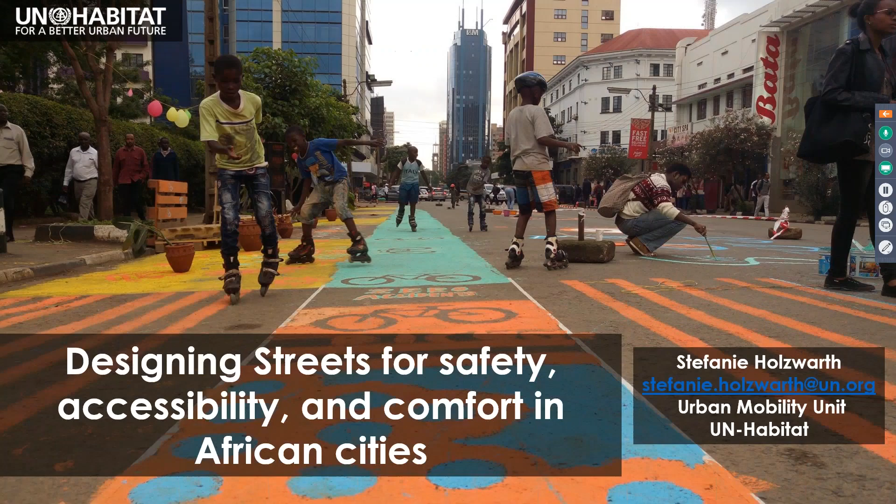We are headquartered in Nairobi in Kenya. As Blake has mentioned, I'll be talking about a street design guideline we have recently developed, and hopefully giving you a few ideas on how to make the streets in your city more accessible and safer for pedestrians and cyclists.

This is a photo that really illustrates my daily life as a cyclist in Nairobi. You really need to be brave to be cycling or walking. However, my dream for the African continent is that cities manage to design their roads in a way that makes them safe for pedestrians and cyclists.

One feature that causes a lot of road safety hazards is vehicle speed. With this graphic, I would like to show you how vehicle speed determines the safety of pedestrians.

On the top left corner, you can see the vision of a vehicle user when he drives at 20 kilometers per hour, with pedestrians alongside the road. If one of those pedestrians stepped onto the road at that moment, they would actually be safe. This could be kids running after a dog or a ball, or any fast-moving pedestrians crossing the road.

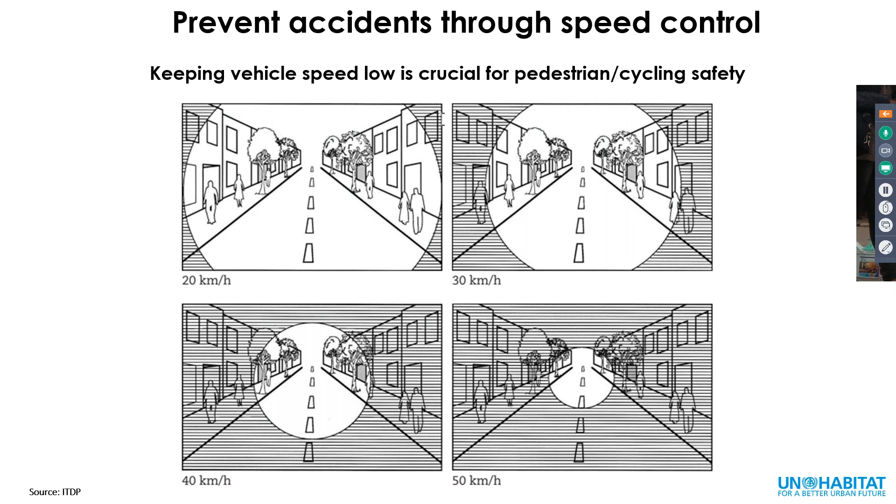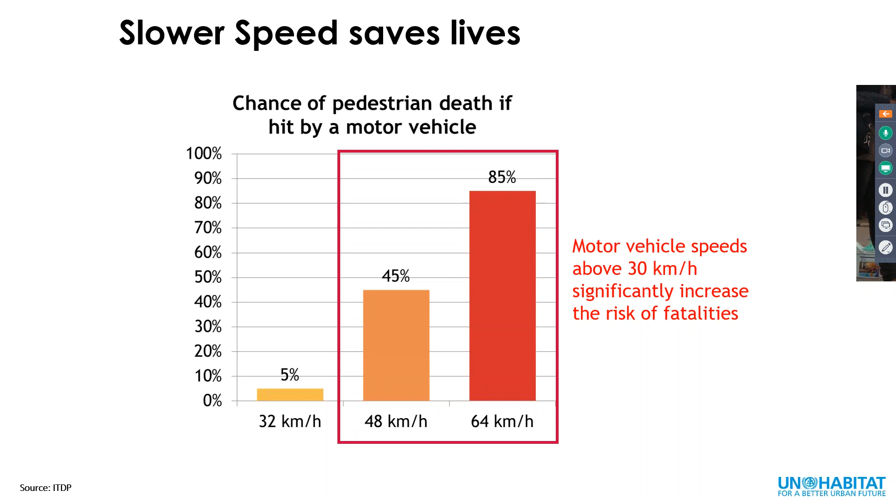Now, the problem we are facing is that most cities around the world have speed limits in their urban areas of 50 kilometers per hour, which poses an enormous risk on pedestrians.

What do we need to make our pedestrians safer? We believe all roads and urban streets need slow zones. If you have a narrow right of way, as shown on the left, the entire width of the road should be designed as a slow zone, reducing vehicle speeds to less than 30 kilometers per hour and creating a shared space where pedestrians, cyclists, and motorists share the space.

If you have a wider street and a bigger right of way, you can separate the different transport modes into separate lanes - for example, public transport lanes, a carriageway for motorists, and also safe walking and cycling lanes.

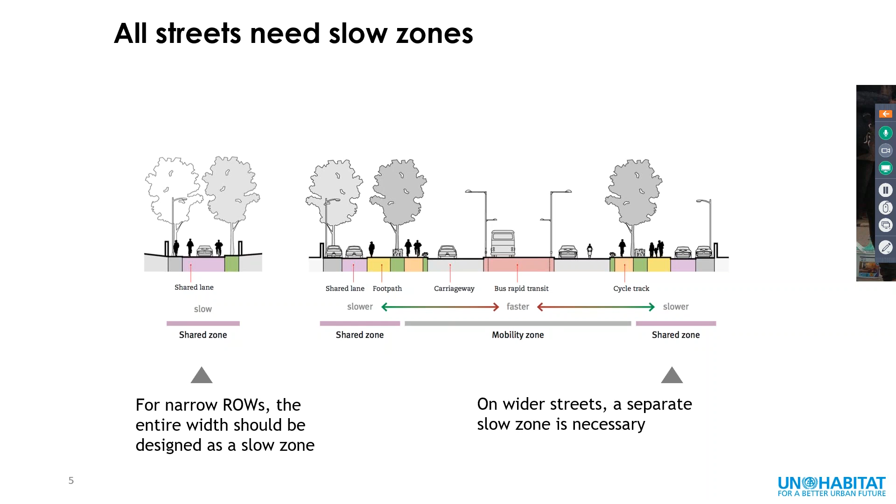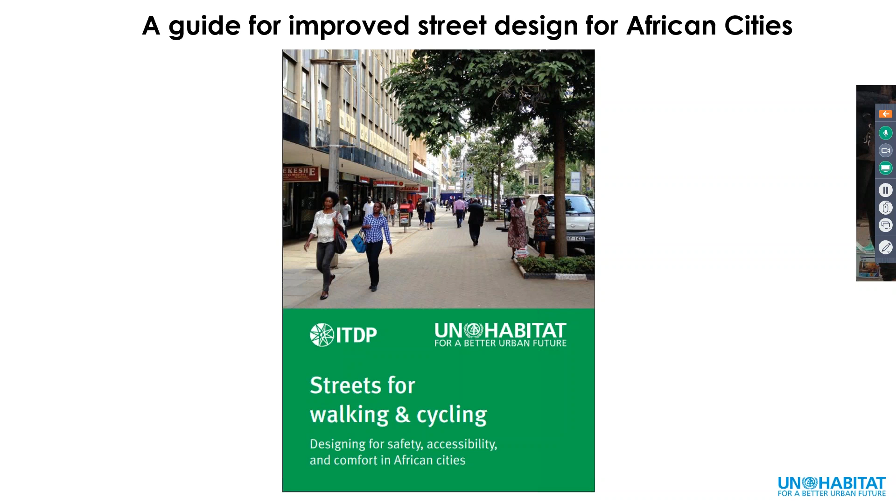Blake has mentioned it in the introduction - we have recently developed a guide for streets for walking and cycling for African cities, in collaboration with our partners from the Institute for Transportation and Development Policy. I would like to briefly take you through a few design ideas from that guide.

First, I would like to talk about footpaths. We believe footpaths should be divided into three zones. There should be a clear demarcation for a pedestrian zone in the middle - a continuous space for walking with a minimum width of 2 meters, so that two wheelchairs can pass each other in opposite directions. This pedestrian zone should be kept free-flowing, without any obstacles.

On the left side, we could have a frontage zone, demarcating a buffer between street-side activities such as cafes or shops and the pedestrian zone. On the right side, we could have a furniture zone for landscaping, street benches, lights, bus stops, and so on, clearly separating the pedestrian zone in a safe way from the motorized lanes.

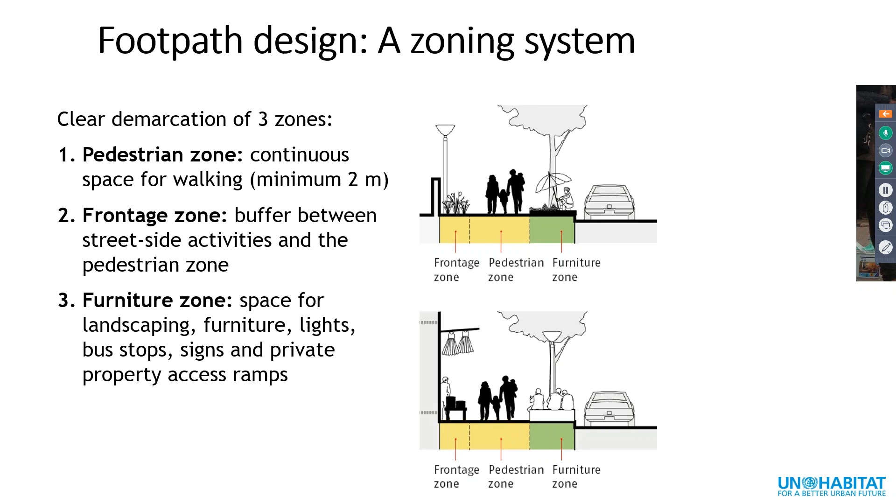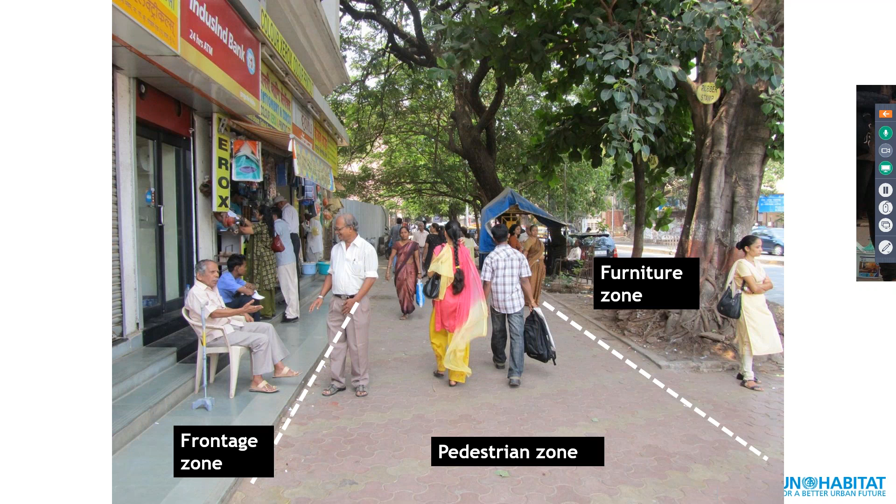How could that look in reality? This is a photo from ITDP from a city in India. You can see the frontage zone, the pedestrian zone ensuring free flow for pedestrians, and the furniture zone on the right keeping a safe distance from the motorized lane.

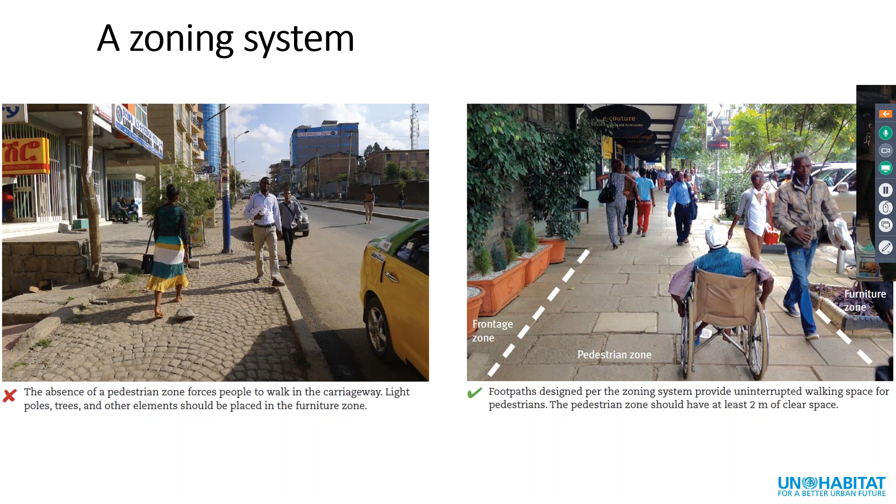On the right side, you again see a best practice example, this one from Nairobi, where you can see the clear demarcation into those three zones, allowing for an unobstructed flow of pedestrians in the middle.

This again shows the example, as I mentioned, at least 2 meters, if not even 2.5 meters, for two wheelchairs to be able to pass each other in the middle.

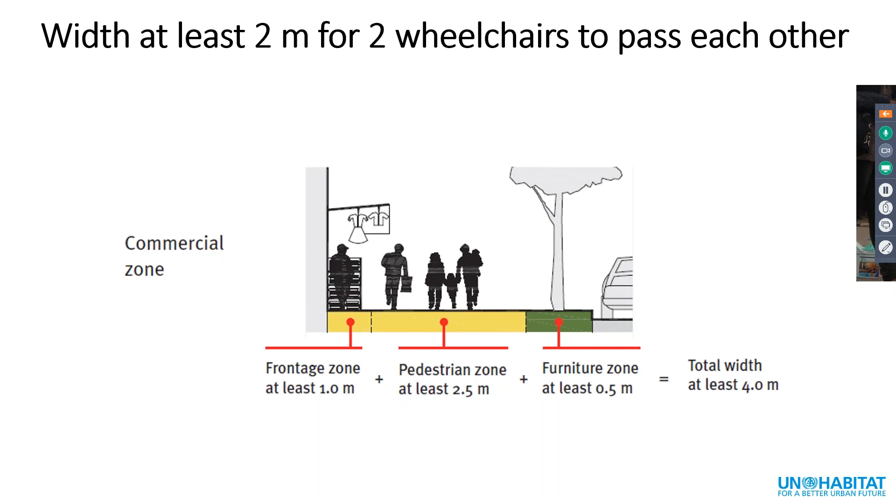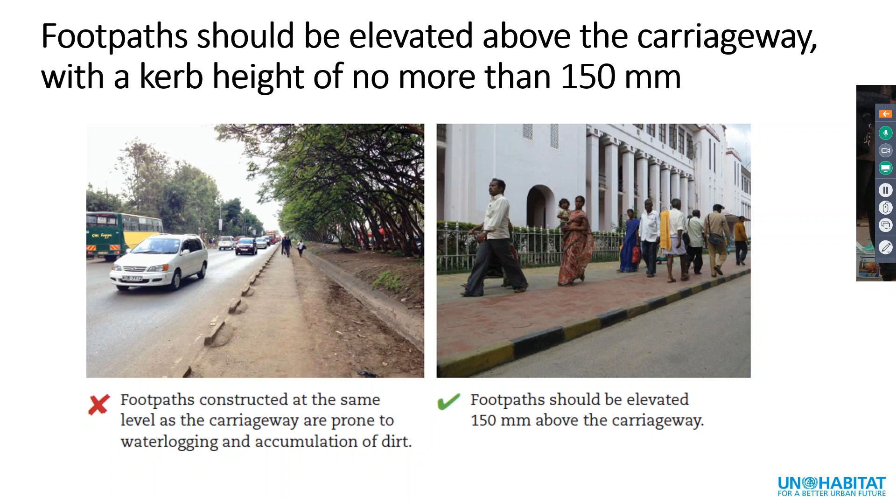Footpaths should in addition be elevated above the carriageway with a curb height of no more than 150 millimeters. On the left side, you can see an example from Nairobi where there's no elevation, meaning there's a lot of dirt on the pedestrian walkway and cycle lane, but it could also cause waterlogging in times of heavy rains. On the right side, you see a best practice example where the walkway is elevated, and pedestrians have a pleasant and safe environment to walk.

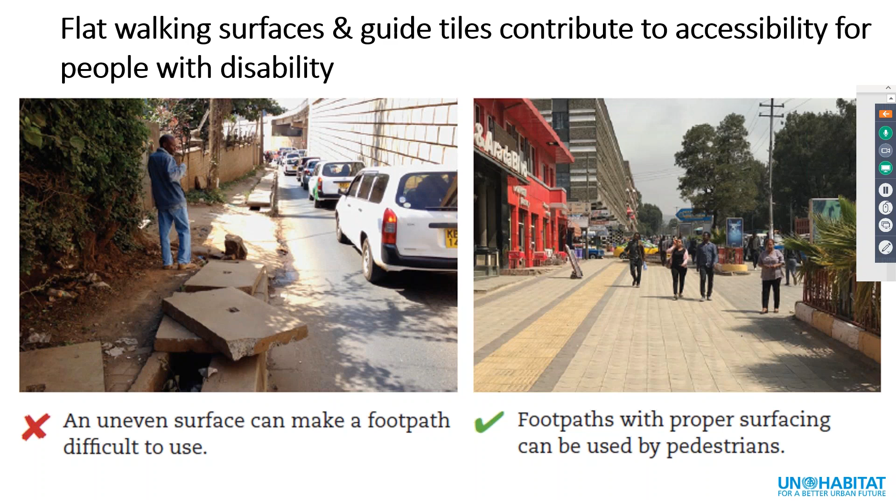So back to the footpaths. They should also have a flat walking surface and guiding tiles that contribute to accessibility for people with disability. On the left side, you see an example from Nairobi where the drainage is really hindering an even surface, so a person in a wheelchair would not be able to use those facilities. On the right side, you can see tactile designs for people with visual disabilities, who would be able to walk very safely and easily on that space.

Space for vending is often a question asked when we talk to African government officials. One opportunity to provide space for street vending is giving them space on the side of the pedestrian zone. As I said, there are 3 zones, and the pedestrian zone should be for the free flow of pedestrians, but street vending space could be given on the left side, as you can see on the picture on the right. This doesn't only enhance the local economy, but also enhances safety for pedestrians, because there would be a lot of eyes on the streets, especially at night times.

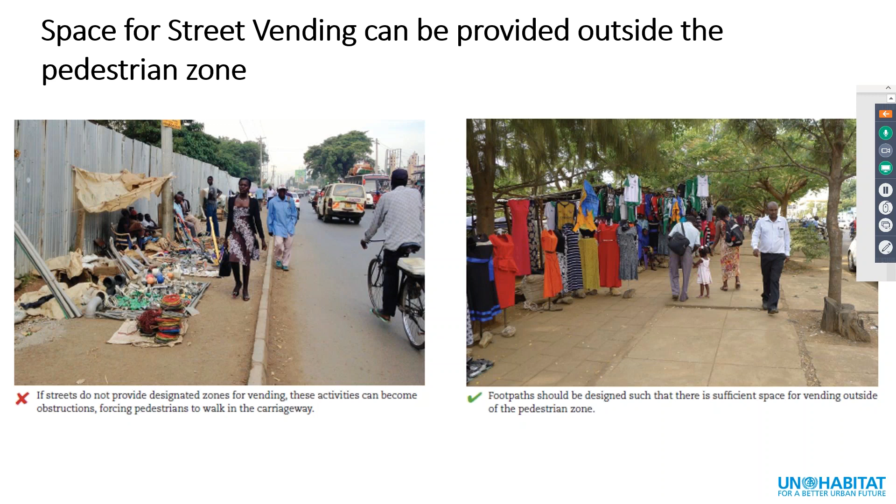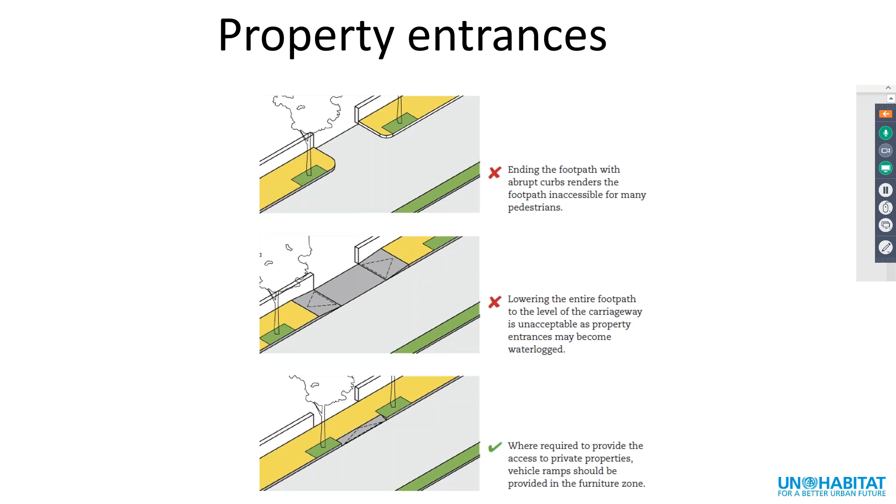How do we deal with property entrances? The first 2 graphics are examples we would not want to promote because they are not accessible. Imagine a person in a wheelchair trying to get from one side of the entrance to the other. In the first picture it would be impossible. In the second picture, there's a ramp that takes the pedestrian onto the level of the carriageway, but this is also very prone to waterlogging and allows for high speeds of cars. The best example is number 3, where we provide a continuous access and continuous level for pedestrians, and take the cars and vehicles onto a ramp to get onto the level of the pedestrian footpaths. That would slow down vehicle speeds and therefore enhance pedestrians' safety, allowing them to walk easily on a continuous footpath.

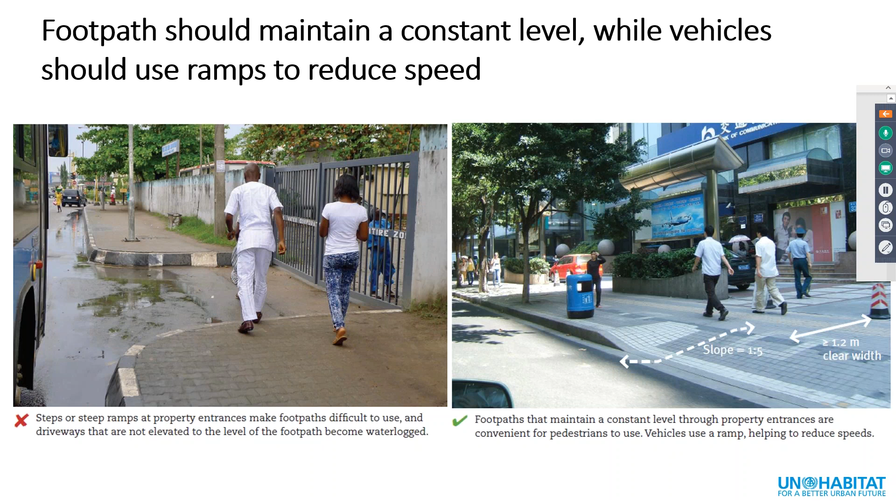How does it look like in reality? On the left side, an example that would be very challenging because the curb height of the pedestrian walkway is too high, and it would definitely not be accessible for someone in a wheelchair. On the right side, you see an example that is very well designed, where cars are taken up on a ramp onto a slope, and therefore the speed would be reduced.

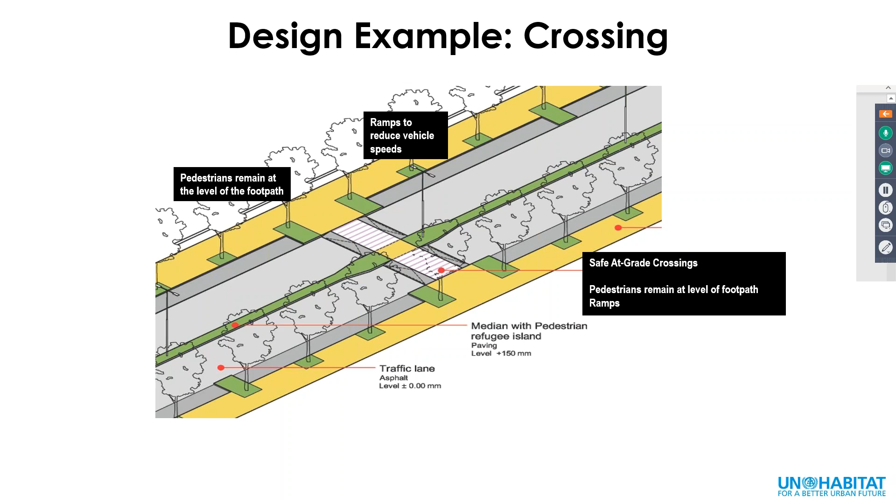How do we deal with crossings? This is a design example of a best practice crossing, where we again keep the pedestrians at the level of the footpaths, but build a ramp to reduce vehicle speed. This is what we call safe at-grade crossings, where the pedestrians remain on the level they have been, but the vehicles are taken up onto the level of the pedestrians.

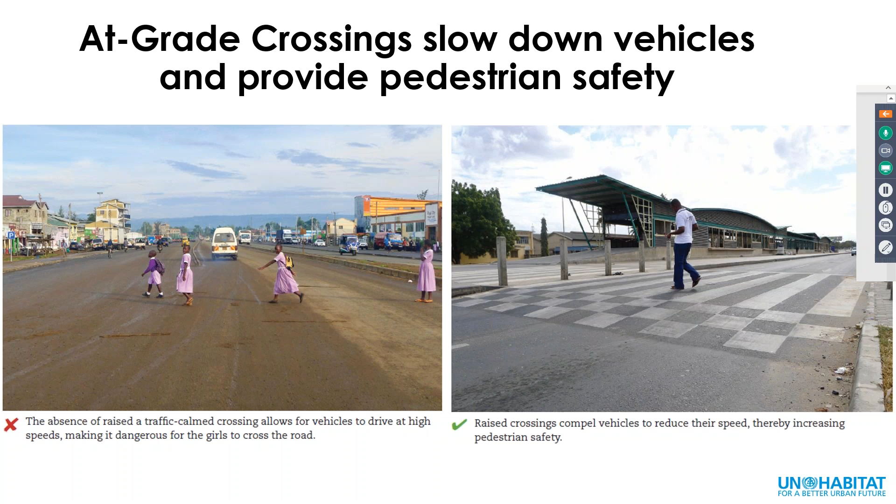This is how it looks like. On the left side, an example from Kenya, where there's no crossing facility being provided, and also no traffic calming measures, so this would be a very unsafe undertaking for school children to cross that street. On the right side, we see an example from the bus rapid transit system in Dar es Salaam, where we have a pedestrian crossing that is elevated, reducing the speed of cars, hence enhancing pedestrian safety.

If possible, it would also be good to avoid foot over bridges and subways. In an attempt to increase motor vehicle speeds, at-grade pedestrian crossings are frequently replaced by foot over bridges or pedestrian subways. However, these facilities are often very inaccessible and have a lot of drawbacks. Drawbacks could, for example, be increased travel time because people would need to go upstairs, and lack of universal access, again because of stairs that would take you either up or down.

These facilities often obstruct the footpaths. They are much more expensive than at-grade crossings. And they are also very much prone to harassment or other crimes, especially during night times. At the same time, if we keep the pedestrians either over or under the carriageway, we are not facilitating any speed reduction of the vehicles.

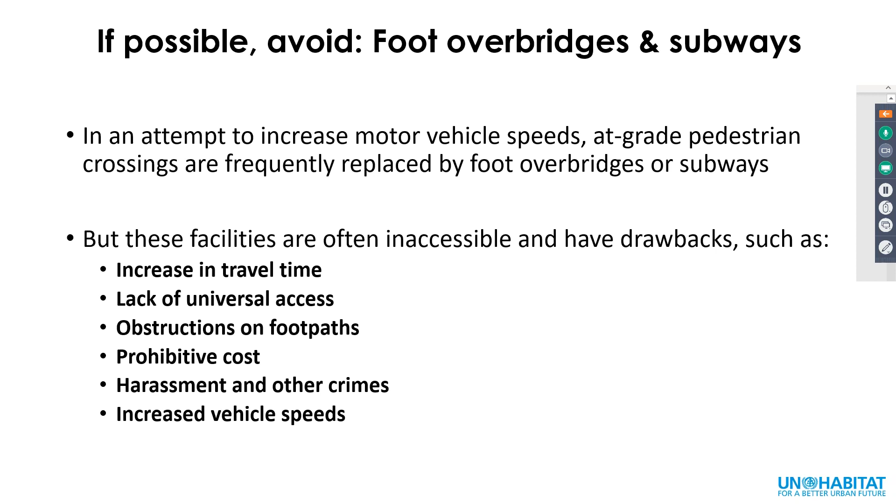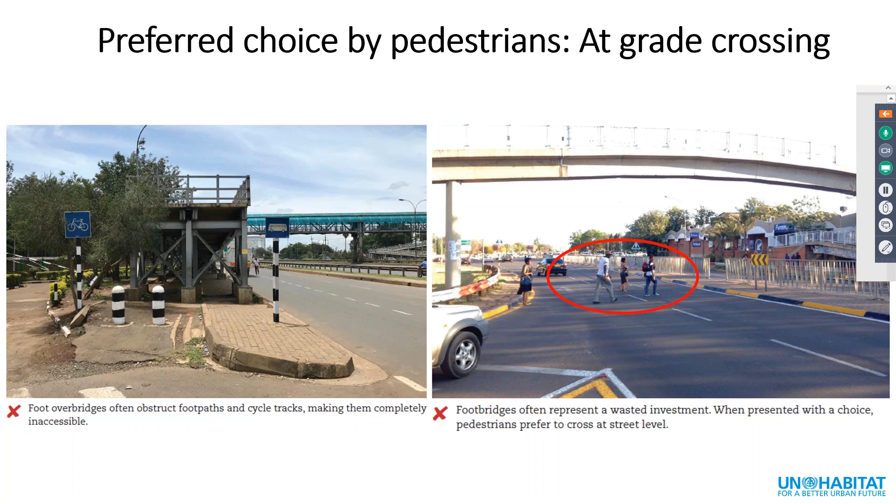Here are two examples of how this could be looking like. On the left side, you can see that the foot over bridge is actually occupying the pedestrian walkway, so that's a very bad example. On the right side, you can see that foot over bridges often also represent a wasted investment because pedestrians are still going for their desired line in crossing the streets the easiest way, meaning they wouldn't even utilize the facility.

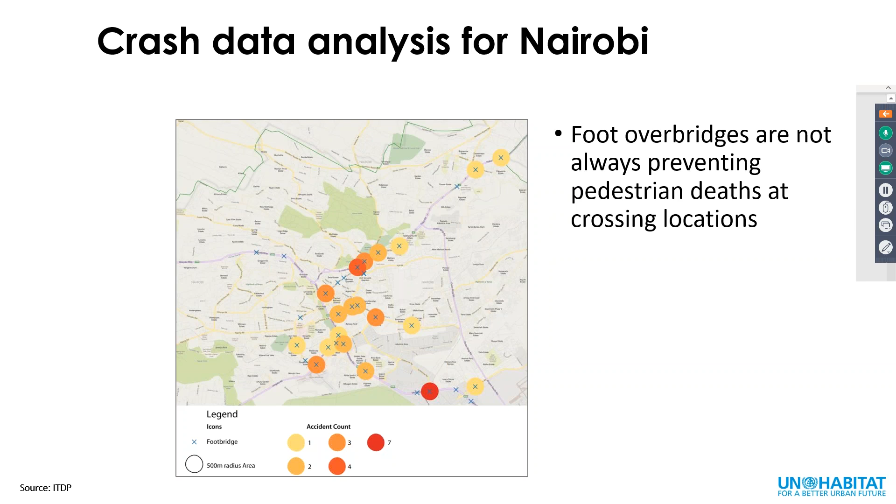Crash data for Nairobi has shown us that foot over bridges are not always preventing pedestrian deaths at the crossing locations, because as the photo I showed you demonstrates, even with foot over bridges, a lot of pedestrians might still be using the at-grade crossing and would therefore still be exposed to a lot of pedestrian safety risks.

How do we deal with intersections? This shows a safe intersection design where we would have direct, intuitive pedestrian crossings. Those should reflect pedestrian desired lines, and we should also avoid detours. So for the pedestrians, the crossings should be minimized in terms of distance, and we should also look into pedestrian refuge islands if we have a large right of way.

For example, in this case, where we have 4 lanes of carriageway, we should definitely put pedestrian refuge islands after 2 lanes, so pedestrians could stop over and take a moment of breath and then get to the other side.

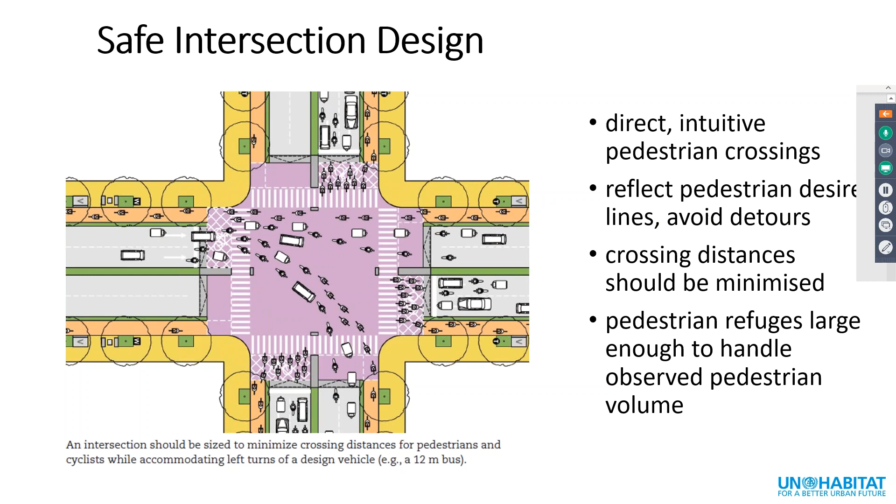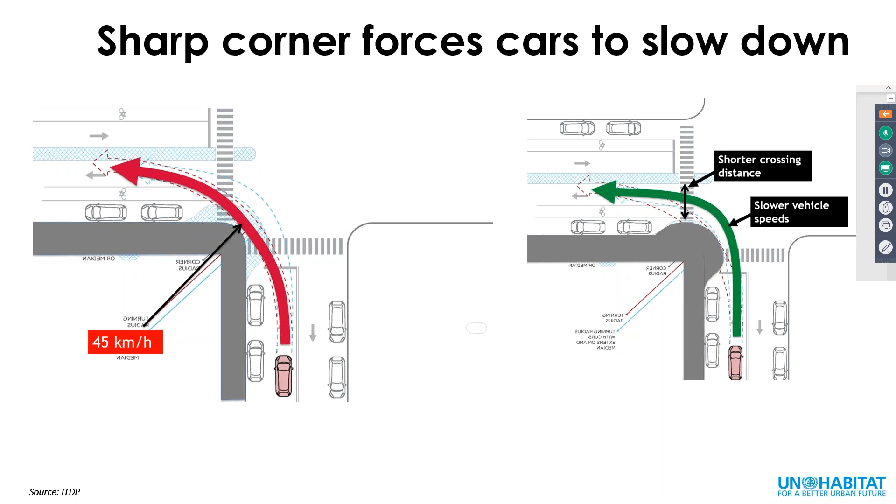On the right side, you can see a design that would make the turning radius much sharper, and that would definitely slow down the vehicle speeds to probably something around 10 to 20 kilometers per hour. And therefore, the pedestrian crossing there on the zebra crossing would be much safer.

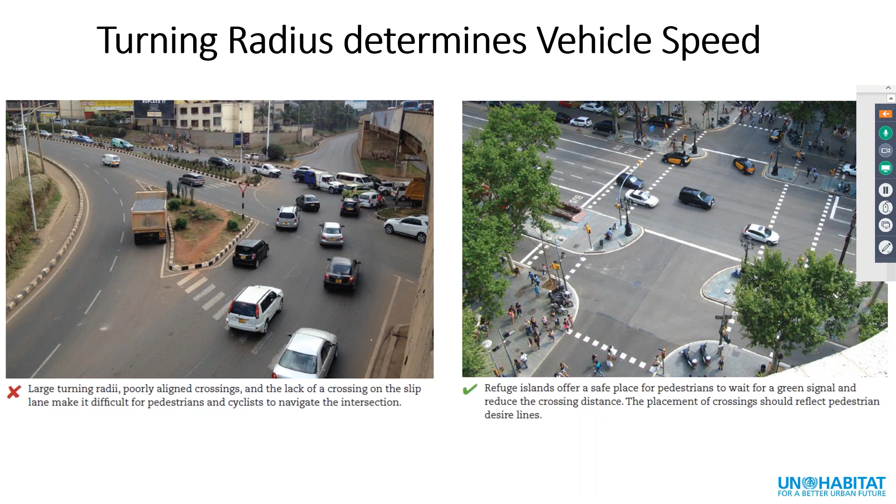If you ask yourself how your city gets to such design features, one activity that has really been very successful in the work that UN Habitat has been doing is temporary open street or placemaking activities. Those are transition experiments where, in a short term, temporary term, we are testing alternative street designs and alternative mobility cultures. Those are activities that really help us activate streets as public spaces, as safe spaces for pedestrians and cyclists, and they can be done through very low-cost interventions, such as pop-up activities.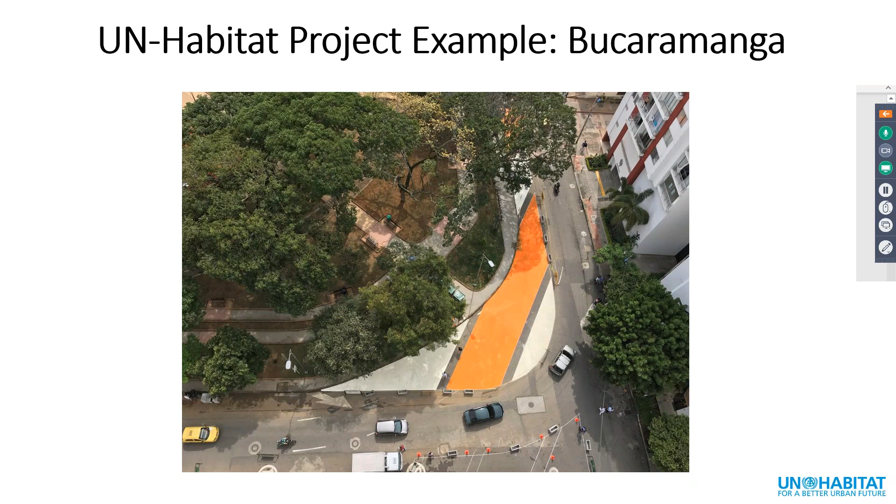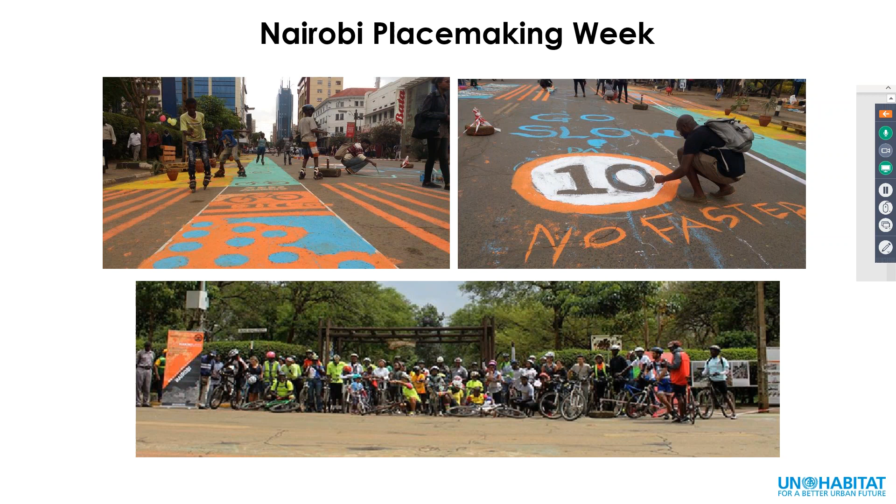Those are examples and photos from a placemaking activity that we have done in Nairobi, where we have tested through painting how the street could be better shared among the different transport modes. So we have also, for example, provided space for cyclists and safe pedestrian crossing facilities.

This is an example from Kampala, where we have tested how we can utilize streets better as public spaces for arts, culture, exhibitions, and painters, and it has really been a very successful exercise there.

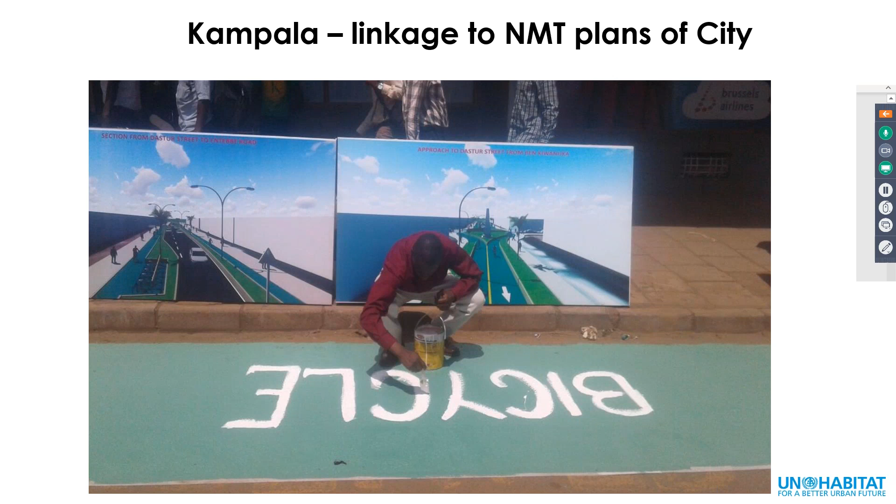What is very important with these activities is that you link them to the plans that the city has. In Kampala, the city government already has strong, far-advanced plans for a non-motorized transport pilot, and the street we chose is part of this pilot, making it a great activity for the government to sensitize the public on their plans.

That's the end of my presentation. If you are interested in the guidebook with the different design ideas, please visit the UN Habitat website and you can easily find it from there. Thank you very much.

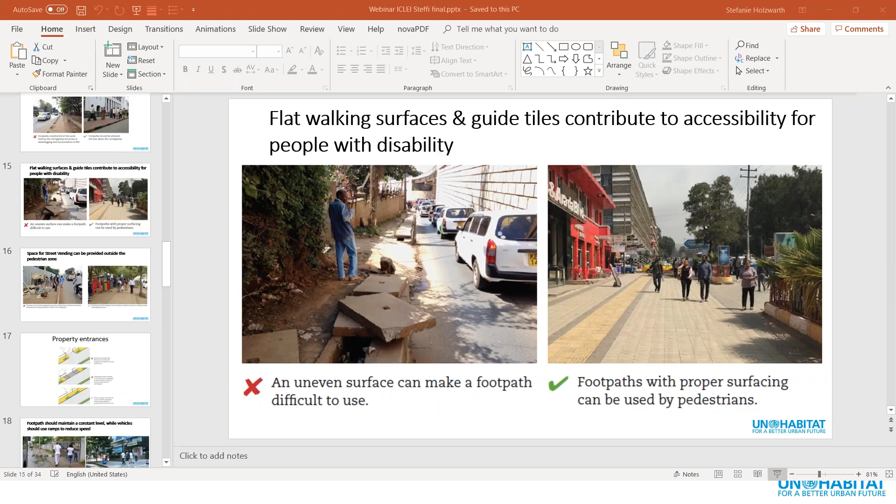Thank you, Stefanie. That was a really interesting introduction to UN Habitat's NMT guidelines. I noticed you mentioned that foot overbridges and subways were probably not worth their investment. Were there any suggestions from the guides on how to approach crossings over freeways? It's a problem we have in South Africa.

Yes, that's why we stated if they can be avoided, avoid them. But on freeways it's very difficult to have at-grade crossings because the speed of vehicles is very high, and a freeway is different in nature, speed, and what it serves than, for example, an urban road. So for freeways, I do understand it's difficult to build foot overbridges or at-grade crossings. But wherever they can be avoided, I would suggest avoiding them, because in South Africa I know they're also quite a safety hazard in terms of security at night.

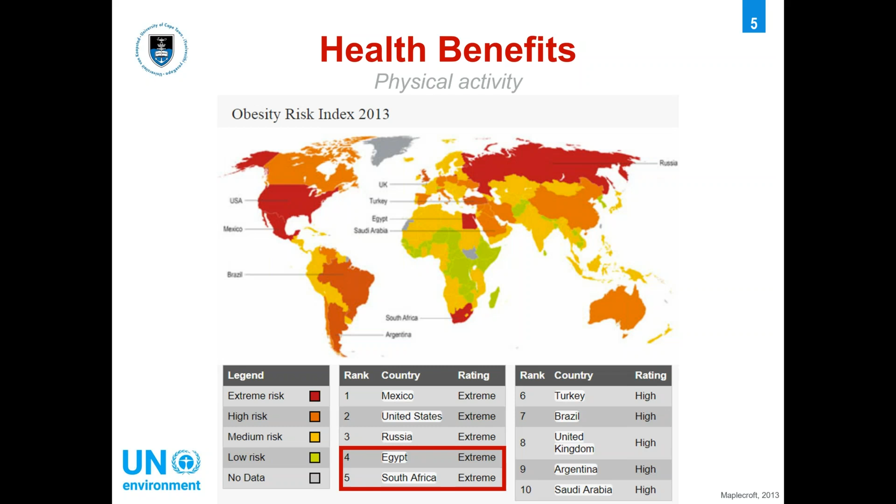Stefanie has very rightly touched on the other major health benefits associated with walking, and actually the benefit doesn't have that much to do with walking itself. It's to do with protecting pedestrians from vehicle users.

As has been stated, we're going to be potentially losing millions of people on our roads over the next few years to road fatalities. And this is catastrophic both for our communities and for our economies. We often speak about the emotional toll that these deaths take on us, but rarely acknowledge the economic one, even when it comes to evaluating where we allocate our budgets.

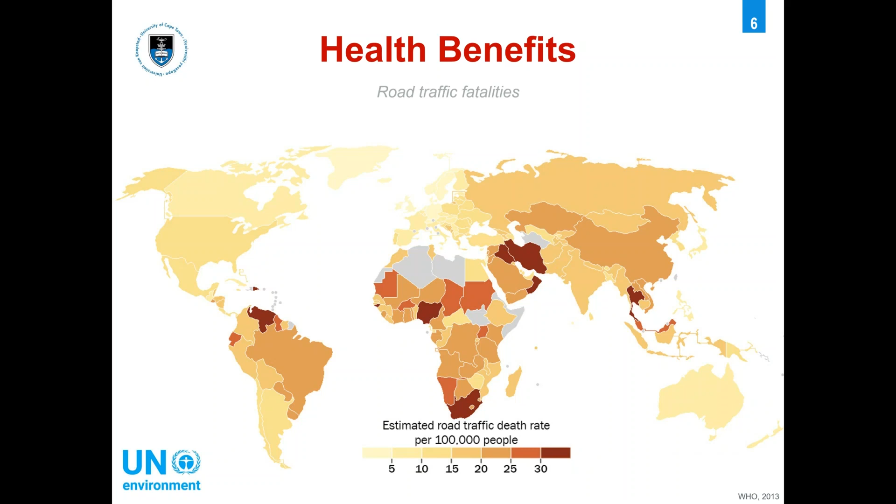And the vast majority of these road fatalities on our continent are pedestrians. And therefore, we could be adding whole percentage points to our economic growth by investing in protecting our pedestrians.

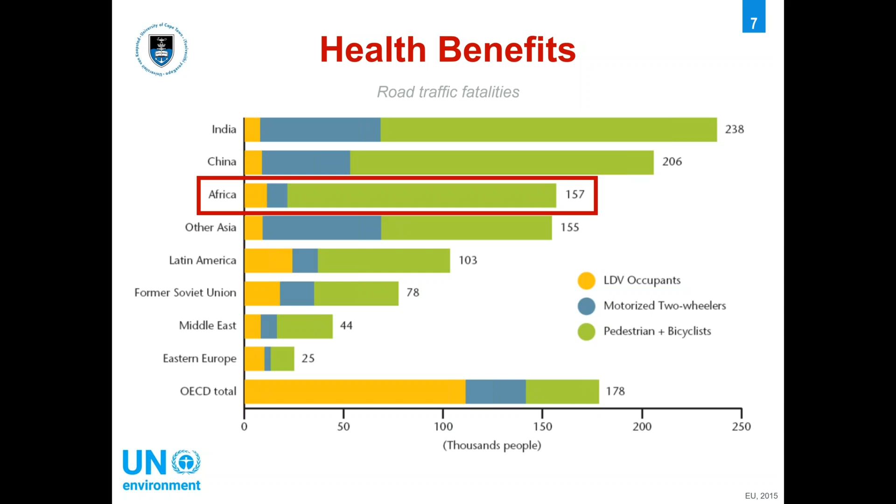And this is especially true for protecting and supporting our young pedestrians. Amend, an organization working in Tanzania, has been building pedestrian infrastructure around schools for as little as $20,000 and achieving a 25% decrease in child road injuries in those areas. So we have international best practice happening here on our continent at a relatively low cost.

Now, some of the benefits of investments in walking and cycling can't be easily quantified or monetized, such as the social benefits. But those benefits can be measured through interviews and surveys and other qualitative techniques. And a holistic picture of the effects of our public investments is critical to creating resource-efficient and productive cities.

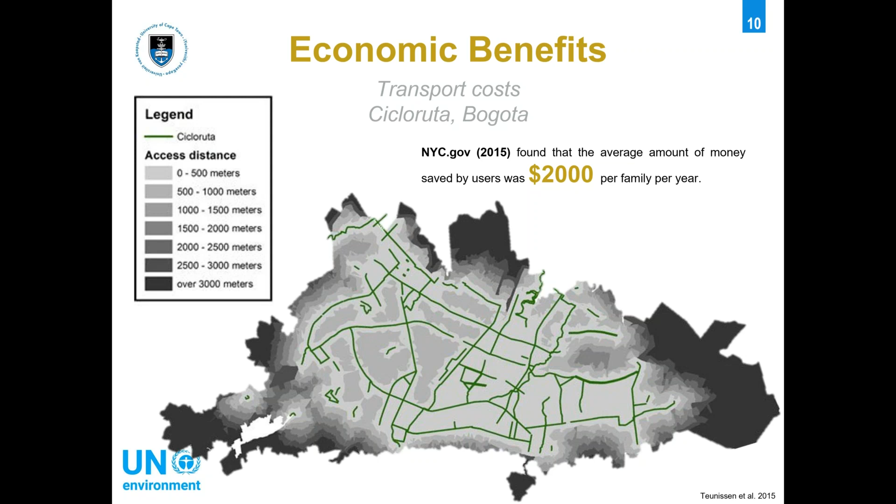Whereas some of the benefits of pedestrian investments are already monetary. The city of Bogota in Colombia built a 370-kilometer network of walking and cycling infrastructure. And they've estimated that the families that use that infrastructure save around $2,000 per year due to lower transport costs. Now, that is money that those families could be spending on their children's education or in starting a business. So pedestrian infrastructure can actually be an efficient way to redistribute wealth and promote economic growth within a city.

Now, all of this work has culminated in a project assessment tool that we built specifically to evaluate the benefits of investments in walking and cycling in African cities. I validated this tool by analyzing that walking network in Bogota. And as the first project, I've evaluated what the potential benefit would be of replicating that successful 370-kilometer network in Cape Town and in Nairobi.

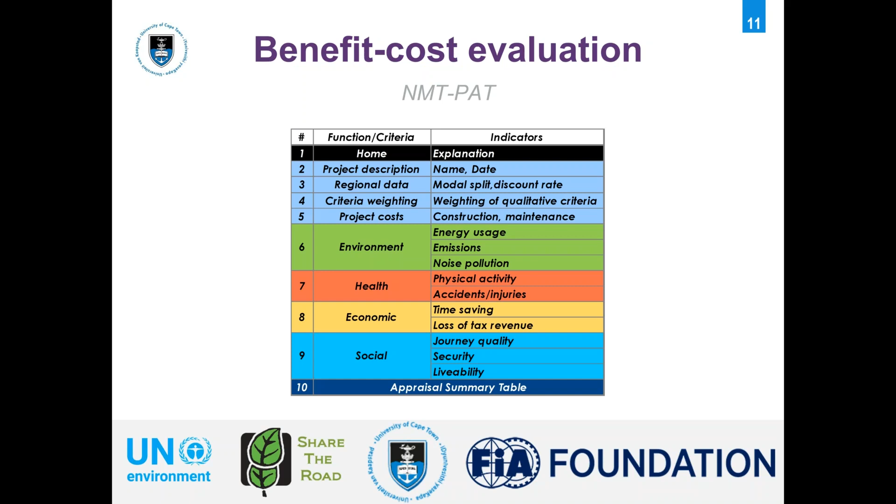Now, the health benefits of this kind of pedestrian network have shown to be equally impressive. Cape Town could be saving 10 lives per $1 million invested in a network like this. And as the average contribution to the economy of a person who lives in Cape Town is around 1.3 million US dollars, that means that the economic return on the investment could be tenfold, purely based on preventing the road fatalities.

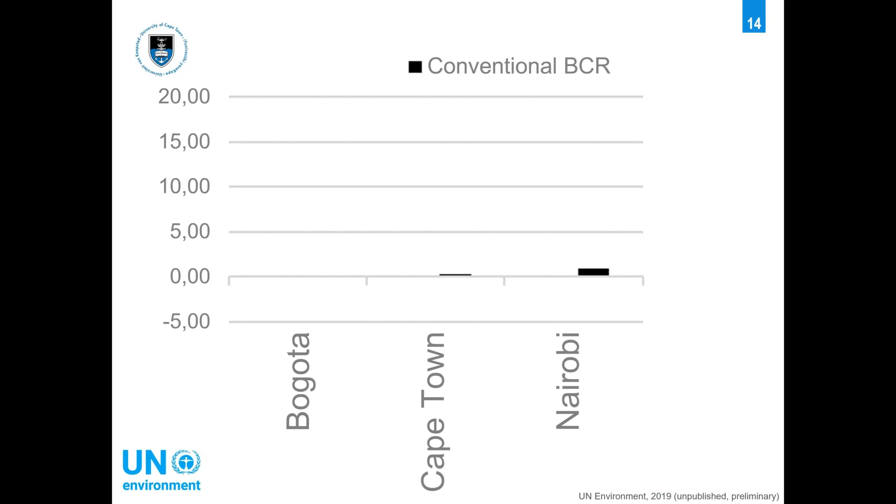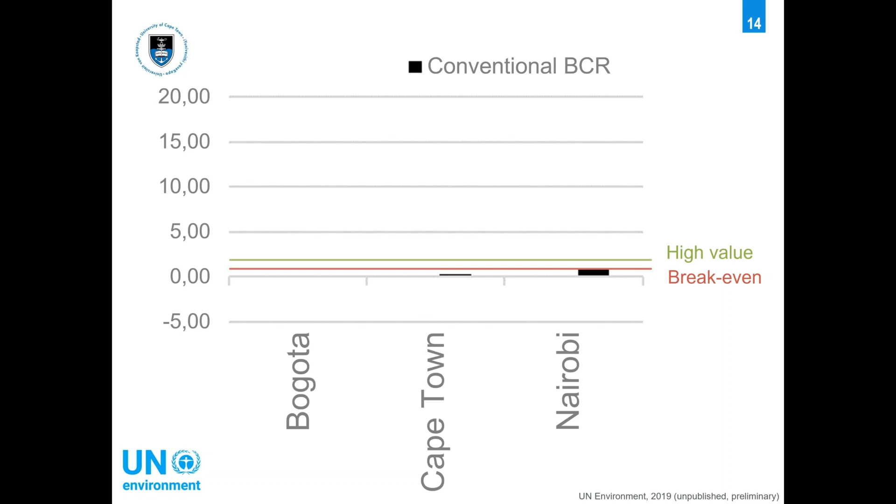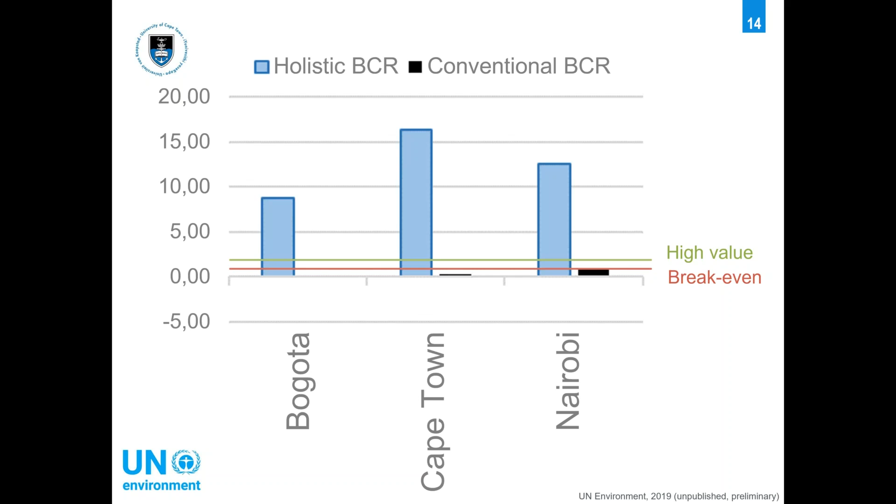And when I was looking at the most comprehensive review that I could find of pedestrian and cycling infrastructure investment so far, which is Davis 2010, she said that the economic justification for cycling and walking projects is rarely even considered in public policy decision making, let alone quantified. So even though she found that the average benefit to cost ratio of pedestrian projects around the world was about 13:1, the average return on investment for road projects is less than 2. So investing in walking infrastructure and walking programs could be generating the best returns of any investment that a city makes, and especially African cities.

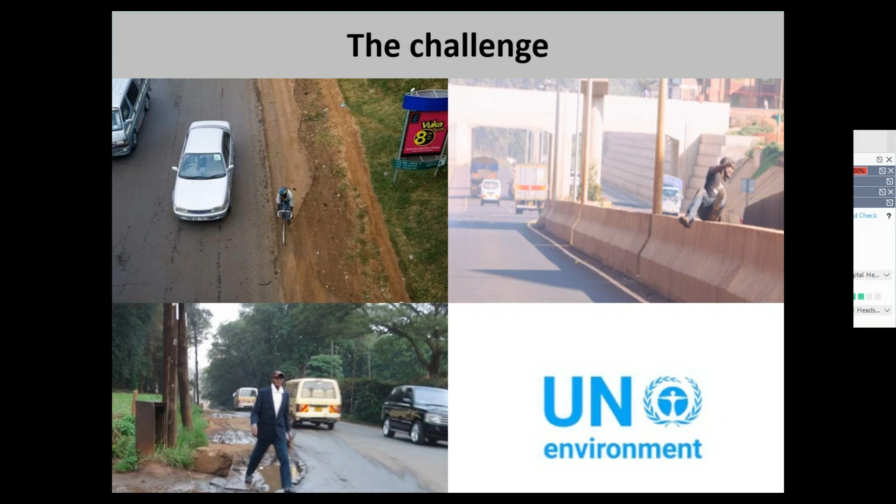We understand a lot of challenges we have on our roads, and we've looked at road safety. But millions of people, just like Sean mentioned in his data, also die from outdoor pollution. We have 3.7 million premature deaths worldwide in 2012. And if that was not enough, vehicle emissions are also fueling climate change. As we speak today, the transport sector is responsible for 27% of energy-related carbon dioxide emissions globally.

So as Share the Road, what is our aim? What are we doing about it? We work to encourage governments to move away from the old, no-equity way of prioritizing the minority, which is car users, towards providing for the majority — people who walk and cycle. In our part of the world, the developing countries, the majority of people walk to work or cycle to work. Those people do not own cars. Providing infrastructure for the poorest is a sign of a city's equity.

A bike lane shows that a citizen on a $30 bicycle is equally important to one in a $30,000 car. That is what we stand for, and that's what we believe in. Why do we push for this? Because people also need infrastructure.

If you look at the screen before you, we have pictures on the left and pictures on the right. The photos on the left show how there was no infrastructure for those who are walking, and look at the population that is walking — there was no infrastructure, they are sharing this road space with vehicles. If you look at the same photo on the right, you see there's an attempt at provision of infrastructure, with at least an elevated pedestrian walkway. It's not the perfect scene, but at least there's a difference — it's clear that there's this segregation for pedestrians. Same with the picture at the bottom: we have a child who is happily cycling in a place where previously there was no cycling lane.

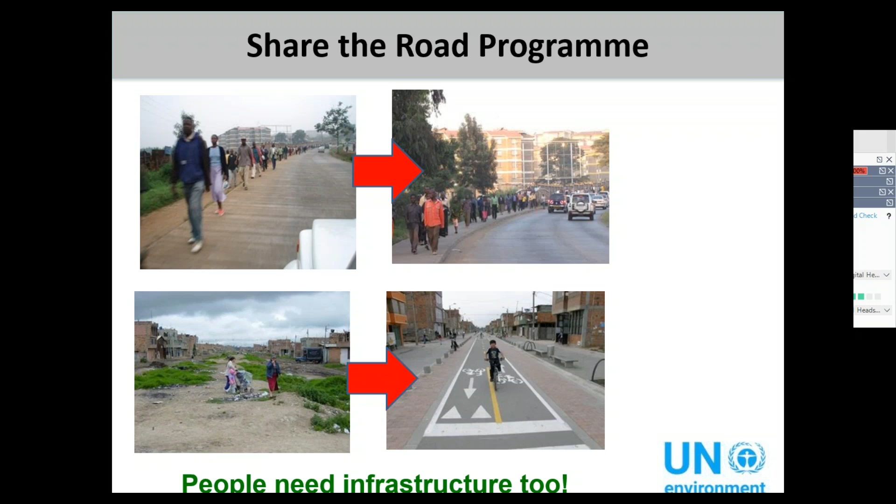So the role of policy is that policy gives direction, policy shows commitment. The process of developing the non-motorized transport policy is also as important as the output itself.

Key to our work is putting in place walking and cycling policies at national and city level. We engage both the federal governments and the county governments.

We are often asked why we need standalone non-motorized transport policies and why it cannot just be included in a wider transport policy. When you look at the lack of provision for pedestrians and cyclists, integrating those needs into wider policy is not working. Until the citizen who walks and the citizen who cycles is also prioritized properly, we will have to continue to push for these policies and bring attention to their needs.

Why is it important that the policy itself, or I should say, what is more important is that the journey to get there brings decision makers in government at national level together with city level governments and others such as academia, private sector, civil service, civil society and citizens.

We understand that the policy gives a public commitment to change and can often include critical fiscal measures, because the financing has to be involved as well.

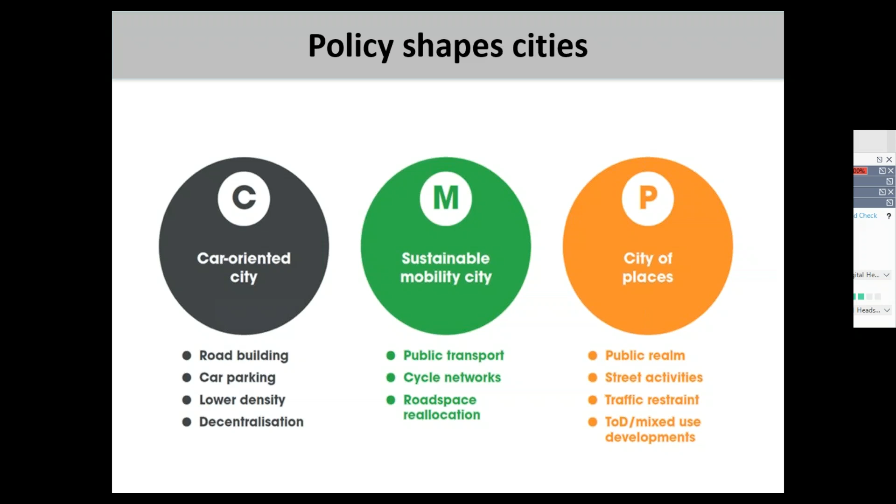When we come to financing, first of all, our work in the Share the Road program covers 7 African countries. So far we've developed non-motorized transport policy in Kenya, Uganda, and Nigeria. We're currently developing the NMT policy for Lagos, and want to do it countrywide. That is encouraging, because it was the citizens and the government that prompted a nationwide policy for non-motorized transport in Nigeria. We've also worked in Ghana, Zambia, Rwanda, and Ethiopia.

Now of course policies are all key, but it cannot be done without financing. Without financing, policies cannot become a reality. An example of financing measures for NMT is Nairobi. Right now, Nairobi's non-motorized transport policy ring-fences 20% of the entire road construction budget dedicated to non-motorized transport.

So as citizens, governments and stakeholders, we have to be very deliberate when it comes to non-motorized transport. We have to make commitments and align those within the policies we develop, including financial commitments, because within Nairobi 50% of the people walk and cycle. In 2015, 700 people died on the roads, with 500 of them being cyclists and pedestrians. So the ring fence of 20% of every road construction budget to cater for non-motorized transport is a positive step, and that's encouraged wherever we develop an NMT policy—there has to be a commitment for financing.

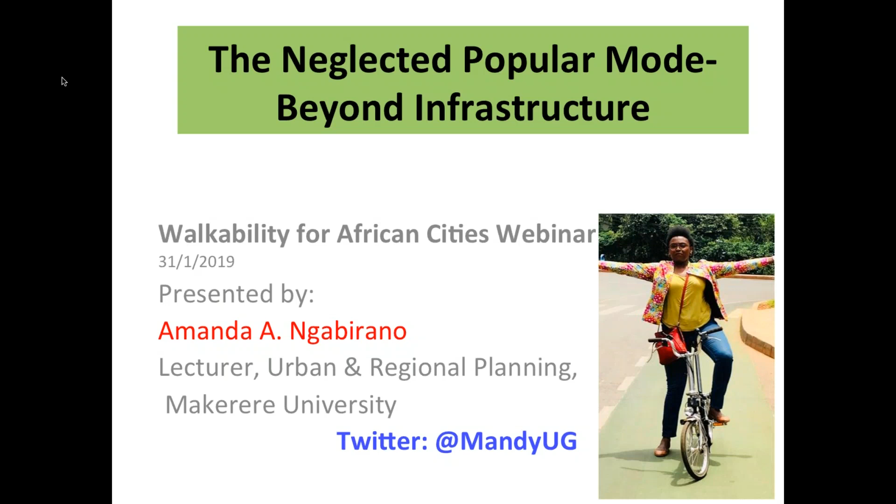We all walk. In the city of Kampala, in Nairobi, the majority of people are walking. So sometimes they don't understand what we are talking about when we are telling them to walk, or when we tell the leaders that walking is good. They kind of feel, yeah, we walk.

But the situation under which we walk is what is lacking or is not really pleasant. So we are lucky that we are still green. In fact, if we are to talk about green cities in terms of mobility, Kampala, I think, is one of them, because the majority are still walking, and the motorized transport is about 10% only, and 60% is actually active.

Mobility, mostly walking, and some people are cycling. As we move around our streets, we see scenes like this. They look like some movies, bad short movies. This is like a whole family crossing a road that performs like a primary road, actually, because it connects to Nairobi, to Mombasa.

And there is no facility for people to cross. Like Stephanie mentioned, there's a footbridge somewhere there, but there's a market across this road. And there are also schools somewhere close by, so it's difficult for people to use that footbridge and go the other side. So it's generally unsafe to walk, and that's why when people see corporates walking here, they ask them why they are walking.

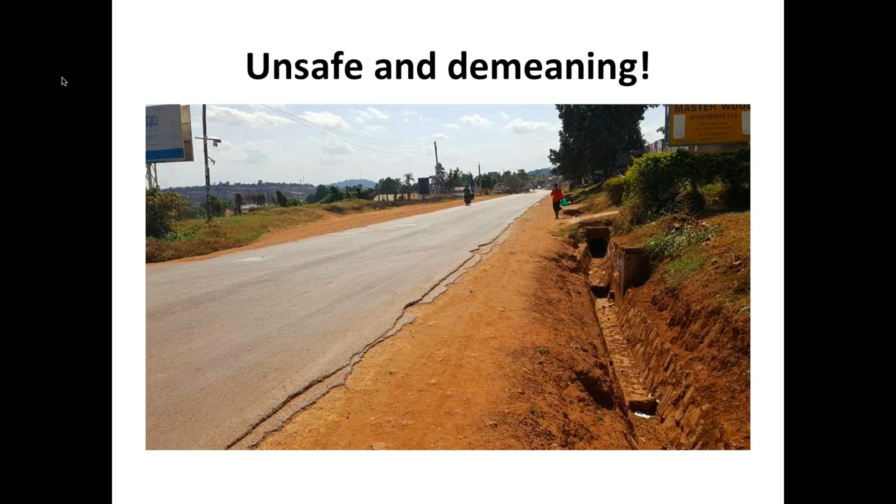Some walking facilities look like this. Actually, here there's no walkway at all, and sometimes vehicles kick us out of this space. And we have to find our way somehow to manage. And this goes on, it becomes a normal thing for people to do. And we feel like sometimes we are cows, excuse me.

So the thing is that the pedestrians also over time take this as something normal. They pity themselves and know that in an African city, in my city, this is how walking is. I don't maybe deserve better. So there's kind of some level of lack of knowledge, of awareness that there should be something like a walkway.

But then the other thing is that when roads are being designed and constructed, what we see on paper is not normally what is actually implemented. So there seems to be a gap in terms of monitoring of road construction projects to make sure that they actually look like what they're supposed to look according to the plan.

In Uganda, we have a policy, thanks to UNEP. The policy has been around, I think, since 2012 or 2013. Some of it has been implemented in Kampala. The new roads, most of them have walkways, good walkways actually. But in most of the country where other road construction projects are taking place, it's not known. And where there are some road networks being implemented, the walkways are not consistent, they are discontinuous.

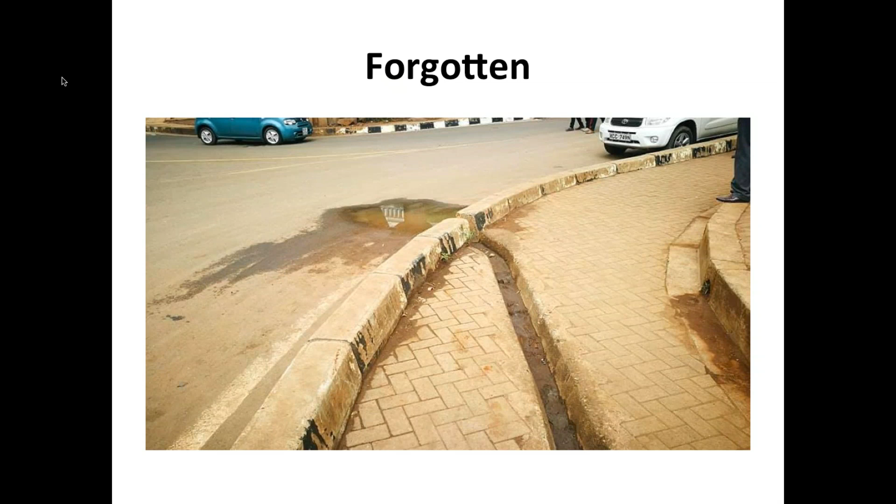It has to start from the beginning, as Stephanie mentioned, and it's nice that we can now have a manual to guide all this. But the gap will still remain in monitoring and evaluation to assess if it's being done correctly or not.

So it's all beyond infrastructure. We have an aspect of the last and first mile in most of our cities. The first mile is mostly not in a good condition. And this mile, the pedestrian could do it because they have no choice or they are close to the station. But over time, it is a cause for a need to move in another way.

And this last mile has to be given attention to be attractive to the pedestrian as well, not only for the car network. If it's not fixed, I'm afraid that we'll have more people choosing to buy cars because of just the last mile, because people tend to leave very early in the morning and then return late in the evening when it's dark. And so they feel safer to move in another way, not as pedestrians.

If we don't address this issue together with the safe walkways, I'm afraid that we will no longer be the walking city that we are. We will lose the pedestrians that we have now to other modes of transportation, particularly private motor transport, because they are going to desire a movement or mobility in a more convenient way at their own time, their own pace, and we will lose them actually. So that's my worry, and for other people that I'm working with here.

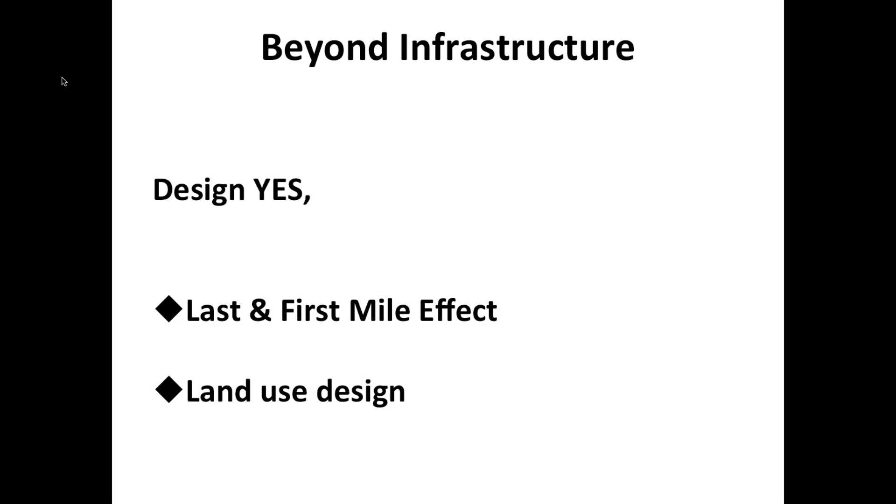The land use design is also lacking because homes are completely scattered. There's no connection conveniently with the markets, with schools. So this actually discourages people that should be walking from walking. There has to be some land use design element that encourages densification, compact planning to bring facilities closer together than further apart.

So this is to show you the last and first mile state of the road. Sometimes when it rains, some of these roads flood, and some are so dusty when it is a hot season, and this cannot be bearable. Someone will definitely not be a pedestrian forever if this kind of last and first mile is left to be like this. We have infrastructure changes taking place, but mostly within the CBD.

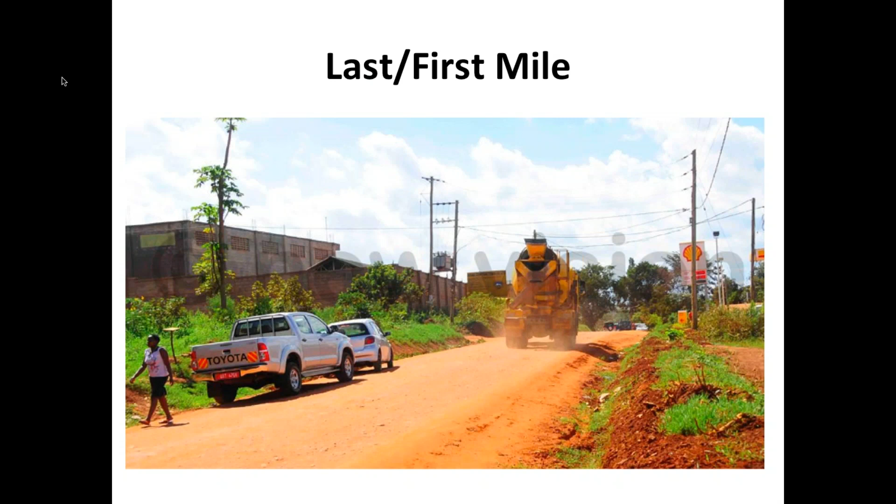So because of the habits that people are accustomed to, infrastructure alone, which is hardware, is not enough. We have to cooperate with civil society, governments, and then the private sector. And then we have to include elements like software, which has to do with culture, education, awareness creation, mindset change.

For instance, we carried out that placemaking week together with UN Habitat in Kampala. It was kind of an awareness creation activity. Last Sunday, we held a car-free day, which was the 4th car-free day in Kampala, and we also held it along the same street where the implementation of the NMT pilot project is taking place. And the road was closed off for about 5 hours off for cars, and everybody was happy with aerobics, dancing.

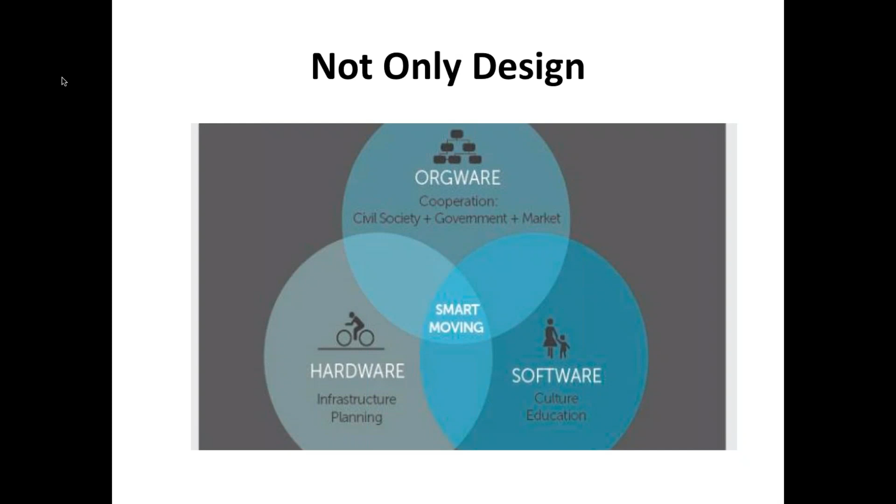So this, with time, people are discussing, what do you mean by car-free zones? Do you want to kick us out of the city? And with time, this mindset change will help the infrastructure to be meaningful and will enable the agencies that are working together to proceed and be able to see their goals really taking effect.

What I don't understand is why pedestrians are not catered for. Is it about money? Is it about prioritization? Is it about the lack of voice from the pedestrians? Is it the comfort? Or nobody is concerned? So this, I don't know. I don't have its answer, because we have 60% of pedestrians, and then we don't see even 40% of the investment going to them.

We may not even be able to successfully explain things like air pollution, that when you have more pedestrians, you have a better air quality, because it doesn't seem to be an issue yet that people are discussing things like air quality. The main thing that is being discussed now is traffic congestion.

When people complain about traffic congestion, the next project one is likely to hear is road expansion, additional lanes. But when people complain about road safety, you will not see this coming up in the same way, and then you have pedestrian walkways being expanded or created. So there seems to be a problem somewhere.

Walkability in African cities is something we have to talk about differently. We cannot say we have to encourage people to walk—people are already walking. We have to encourage cities to work with them in terms of infrastructure provision, so that people walking right now feel treated as human beings deserving the dignity they should have. This can also help reduce the number of people acquiring private cars because of the poor state of walking facilities we have.

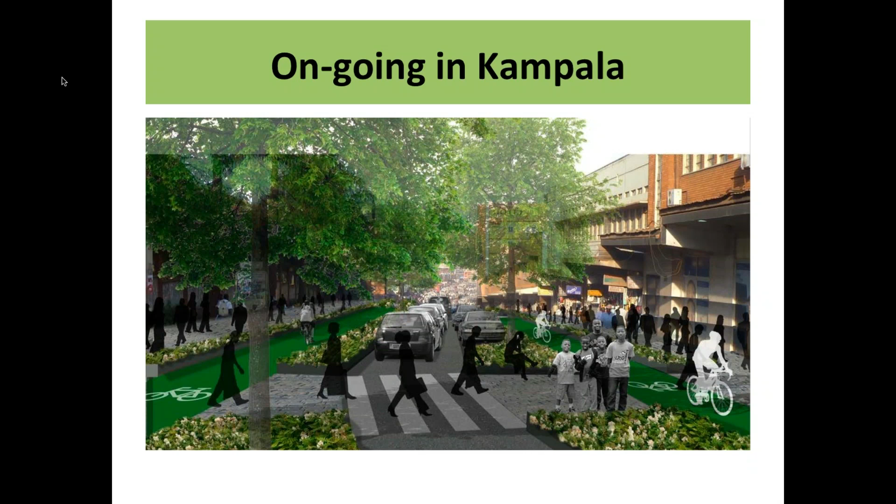Currently, this is the project being implemented. In fact, implementation started from this part of the road. If you go down the valley where you see a lot of vehicles, across is where we held the placemaking week and the car-free day last Sunday. So I hope I can invite all of you to come to our city when this is done, and it looks like this—pedestrians having their own space, green areas, cyclists having their space, and a few cars, of course. We can't kick the cars out completely. Thank you very much, happy to connect with you all.